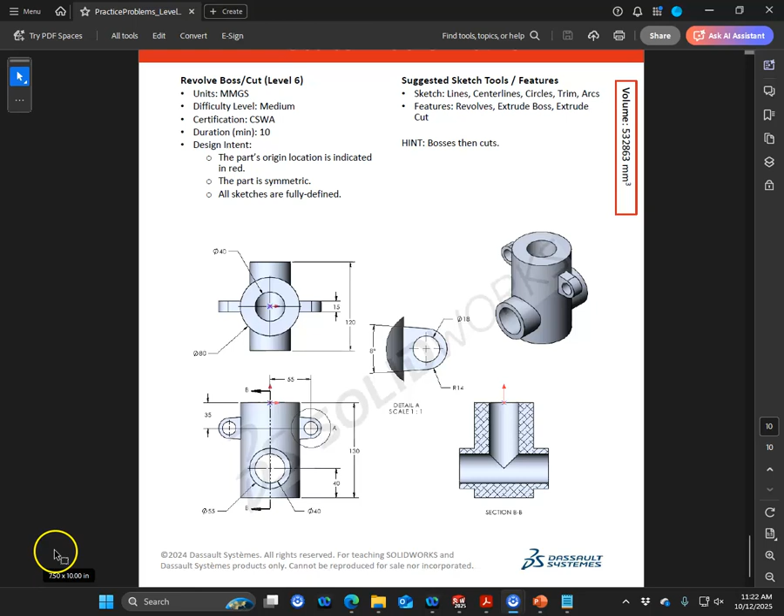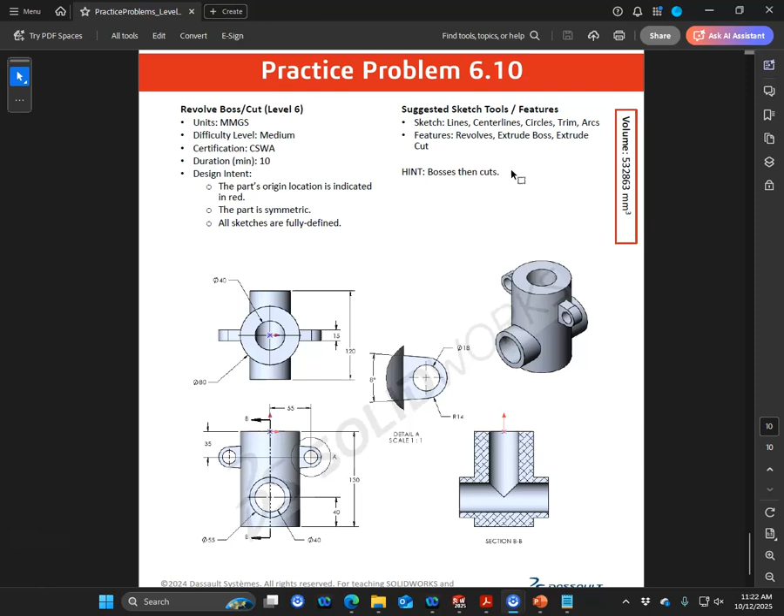All right, problem 6.10. We're still in millimeters. Part origin is located at the top, middle, center. Lines, center lines, circles, arcs, revolves, extrude boss, extrude cut, bosses, then cuts. So I'm not seeing where this really needs to have the revolves, but let's go ahead and do a couple of revolves. We can also revisit the offset plane to make this a revolve.

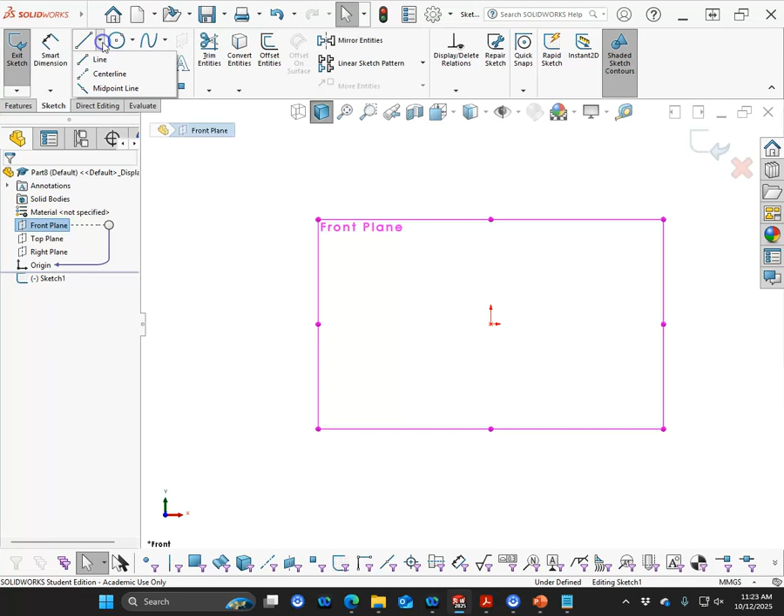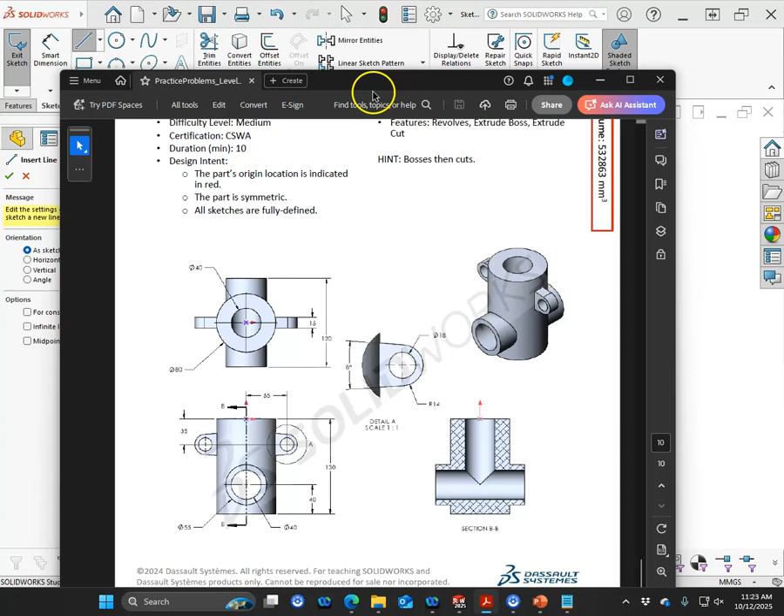So we'll go part millimeter, front plane. Anytime going into the revolve, we're going to use symmetry. I'm going to consider doing the infinite length center line. I thought about maybe putting this kind of shape, but when we go this way, it's going to close that off. We're better off leaving them as solids in this case. So we can just go rectangle, and this is why it's a toss-up for the boss. We're drawing a circle and extruding it, or we're drawing the rectangle and revolving it.

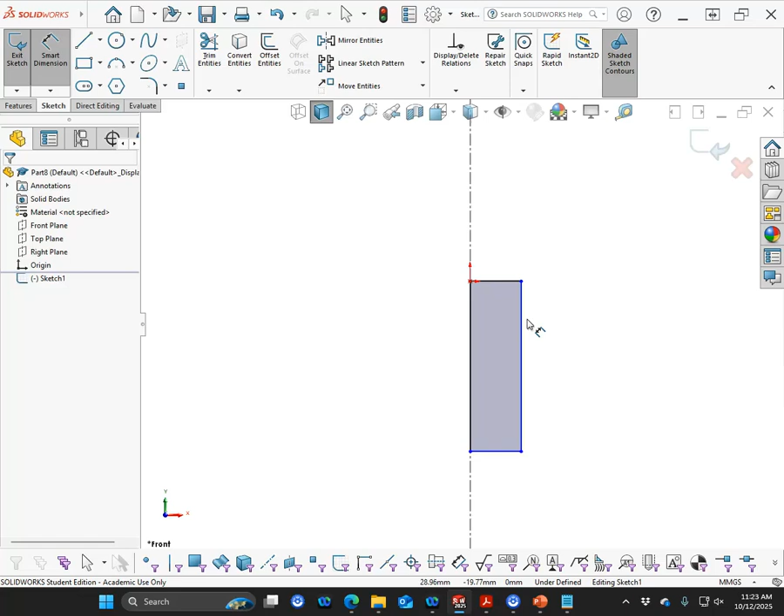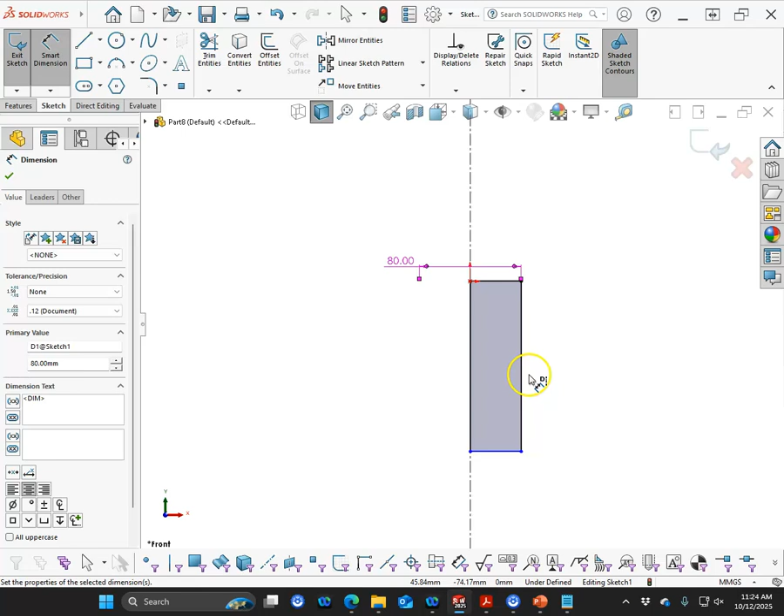So our diameter is, see if we can find a number here. 80. Oh, that is the top side. Okay, 80 with a 40 through. Okay, so 80 on the diameter and 130. I was trying to reverse those numbers. 130, and we just go ahead and we do the revolve base 360 degrees.

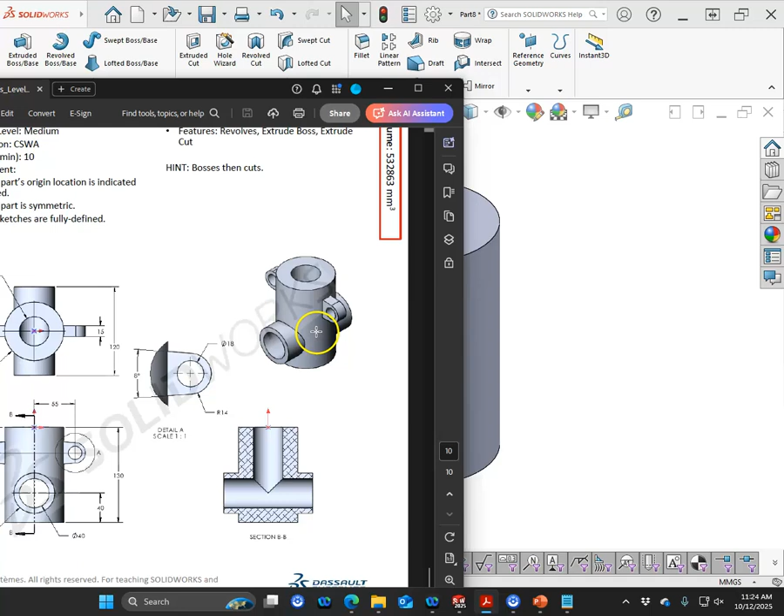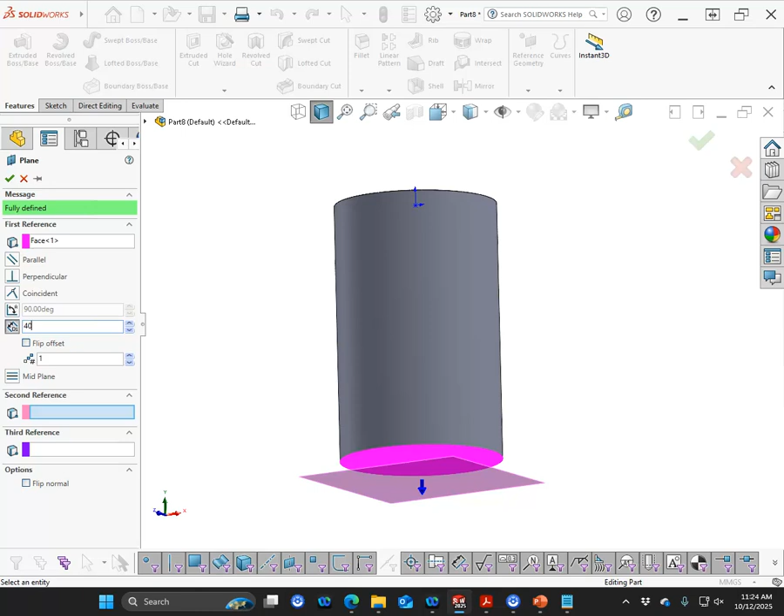All right, so if I just drew the intersecting as an extrude through, I wouldn't have to create a plane, but we want to just revisit planes wherever we can. So plane and its center. Let's see, we need to reverse the direction. So it'll be a flip offset of 40. And when I flip the offset, that should bring it up to there. And we should be able to go right into the sketch.

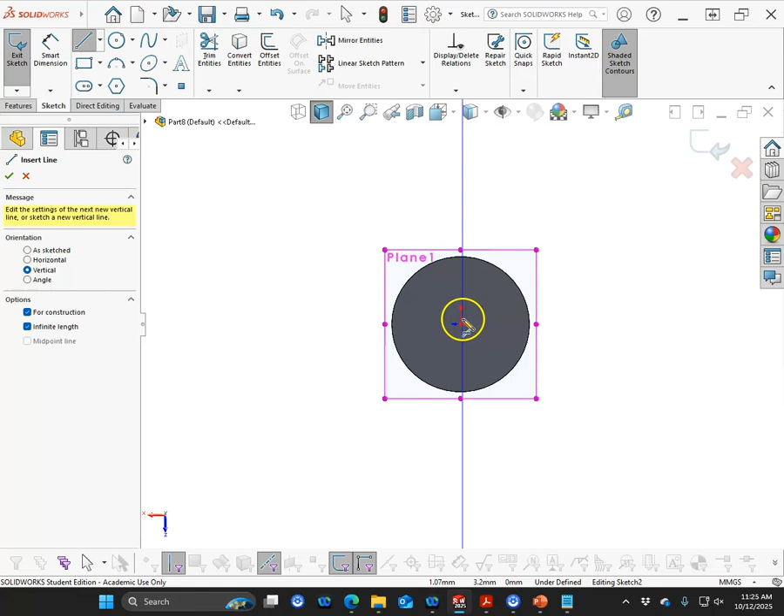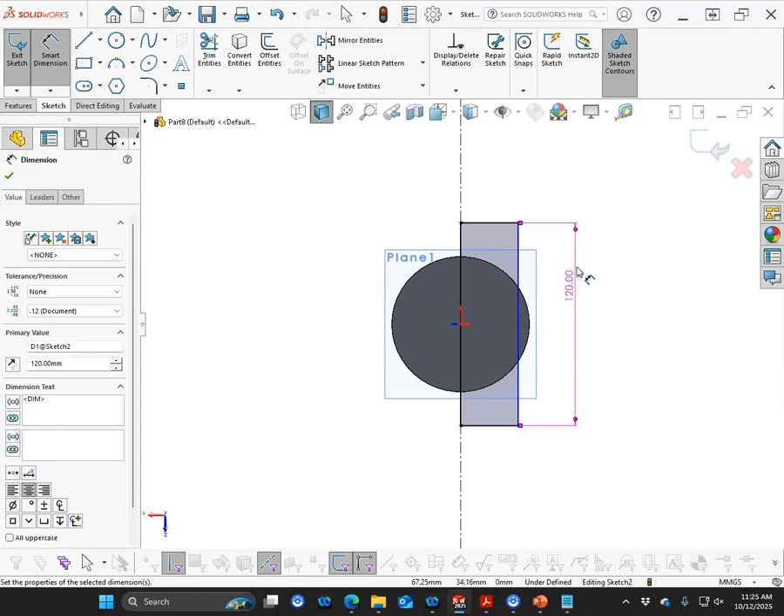Same process, center line. We're looking at the origin, making sure it's going to be vertical, infinite length. And then I can go back into select, except this one is going to go for a midpoint. So if I escape out of the rectangle, select the line, control select the origin, we can go right to midpoint, and its overall is 120 with a diameter of 55. Okay, so when this one does the revolve, we're going to be able to see that intersection. All right, we can hide the plane.

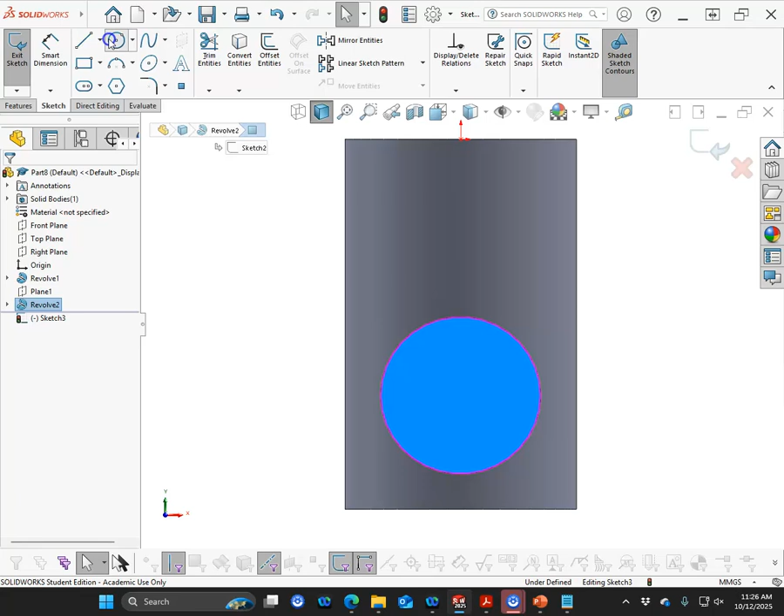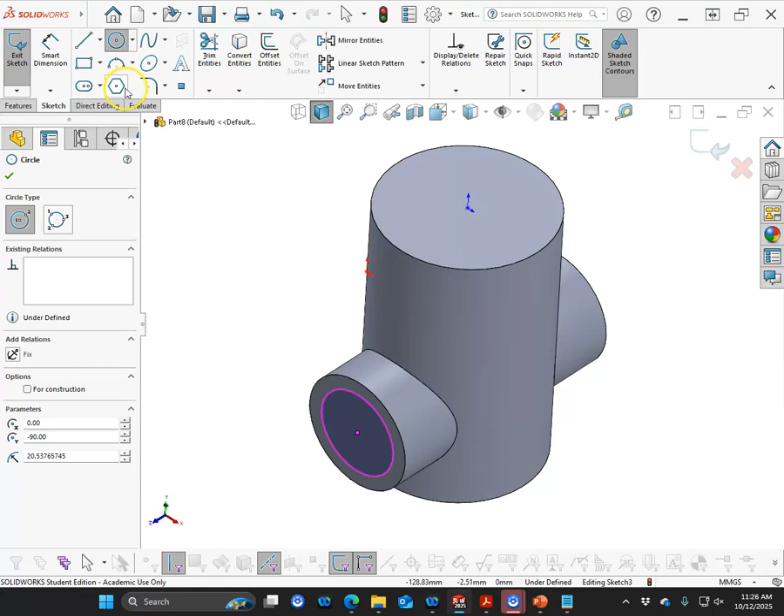Again, you could have opened up a sketch on the front plane, drawn the circle and extruded it mid-plane to 120, and you would have the same result. There's nothing that says otherwise, other than I wanted to create the plane. All right, so my through, I could have included that, except I don't think it would have removed the interior. Since it's a revolved boss, it would not have removed the material on the interior. It would have left that. So doing the extrude cut all the way through with a diameter of 40, features, extrude cut through all is fine. We go ahead and hit OK.

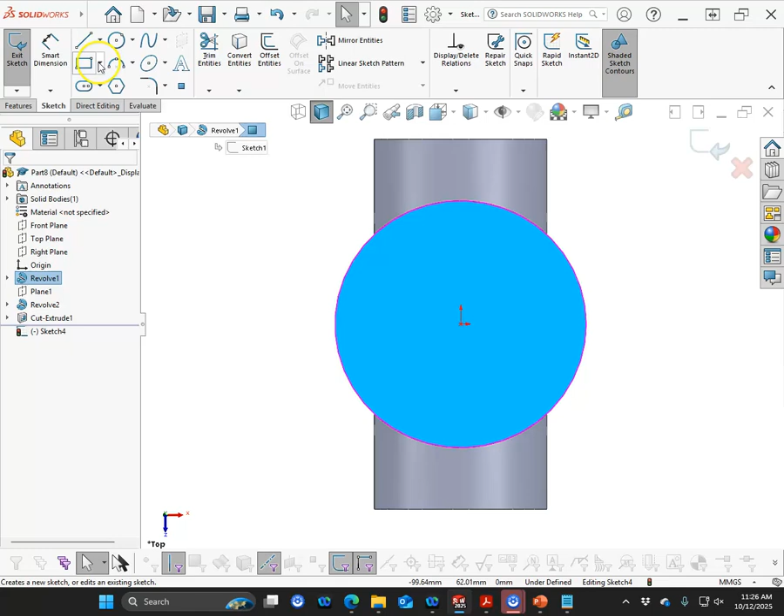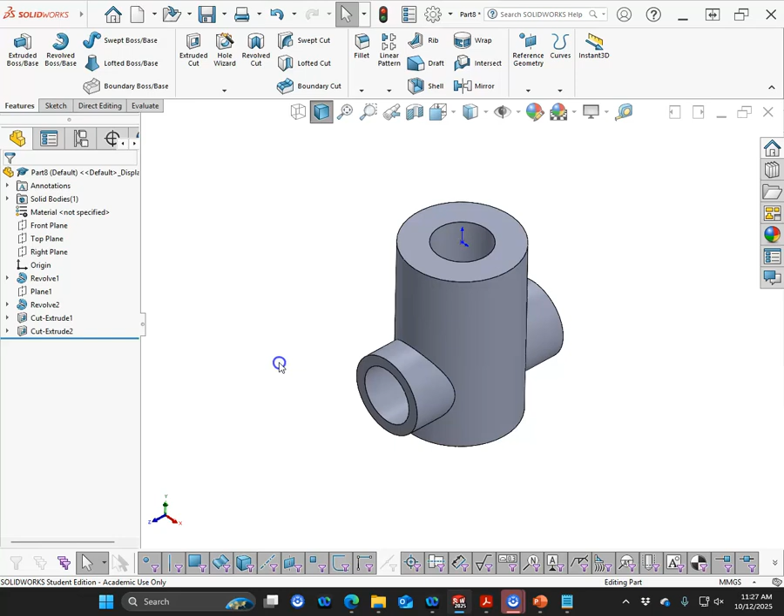All right, for the top then, we can open up the sketch, and that one has a diameter of 40, so they should line up pretty close. Into the smart dimension, 40, and then this one just becomes an extruded cut up to next, so it terminates at the intersecting hole. All right, on the front plane, let's get a sketch started, and these are on the mid plane for the ears. So really only need to draw one, but I need to draw it far enough inside because if I go right to the silhouette edge, it's not going to connect.

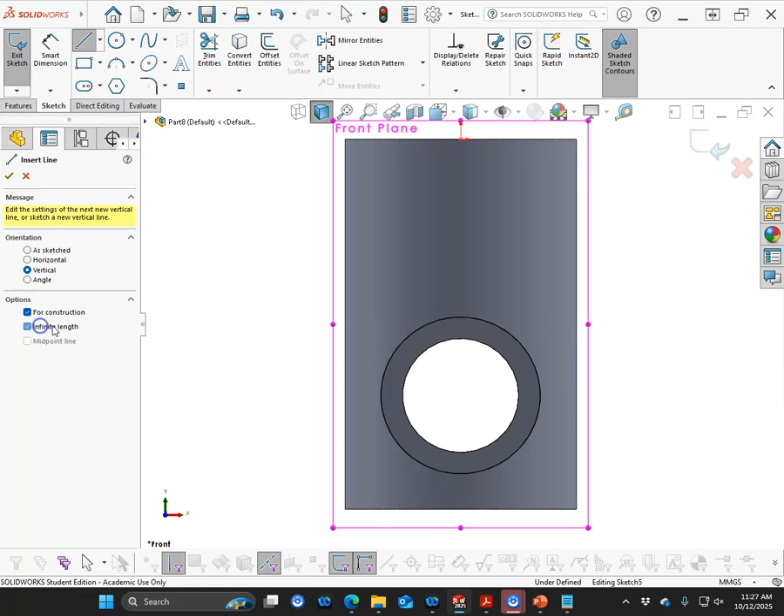So because I want to mirror these, let's add the vertical infinite length center line. And we'll go ahead and put the circle in because I think that one's actually going to give me a little more geometry. So the interior is a diameter of 18. So I'm looking for that smart dimension on the context menu, but this time I'm going to go to select and move that out just a little bit and probably down just a little bit.

All right, so the distance from the top is 35. And from the center line we created is, oh, they gave us the 55. All right, so we can stay with that, 55. And then let's go with our center point arc. And we'll keep moving reverse if I don't like it. I'll keep moving that geometry to get to a starting point, to get the desired result.

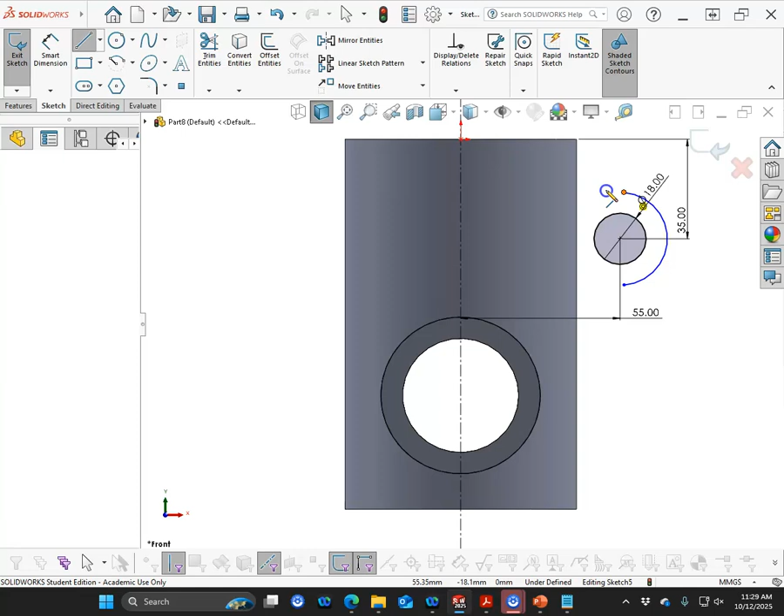So we do want to be inside of our geometry. I'm going to overrun the cylinder. Let's make sure we have some tangencies. No tangencies, so select, Control select, add the tangent, select, Control select, add the tangent. All right, so there isn't really anything adding symmetry. If I don't want to add a center line here, I'm just going to select the midpoint and Control select the center point of the circle and tell it that it's horizontal.

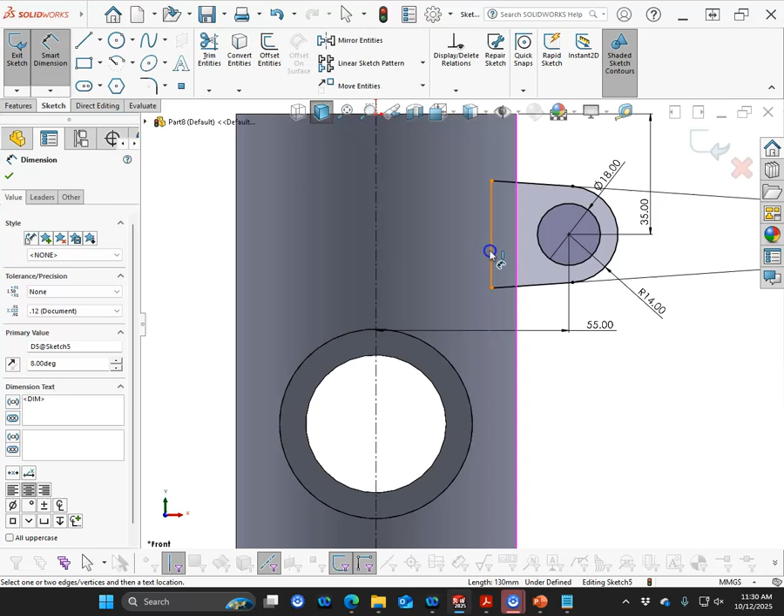All right, so the radius becomes 14, and since it's already an arc, we get the 14. And between the two lines, we get 8 degrees. Yeah, 8 degrees. Not much, but enough. And then we could either go from the silhouette edge to the line or from the center. Silhouette edge is going to allow me to overlap enough that it's going to intersect the cylinder. All right, so let's go ahead and mirror those entities.

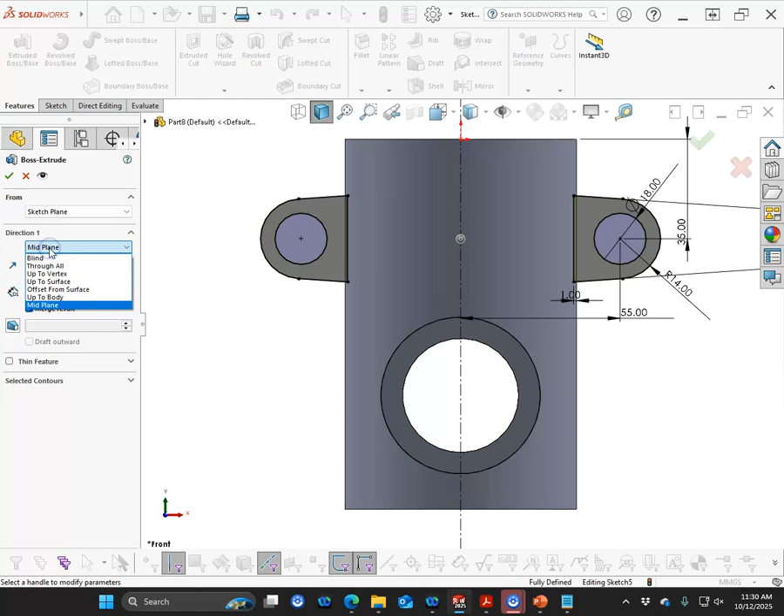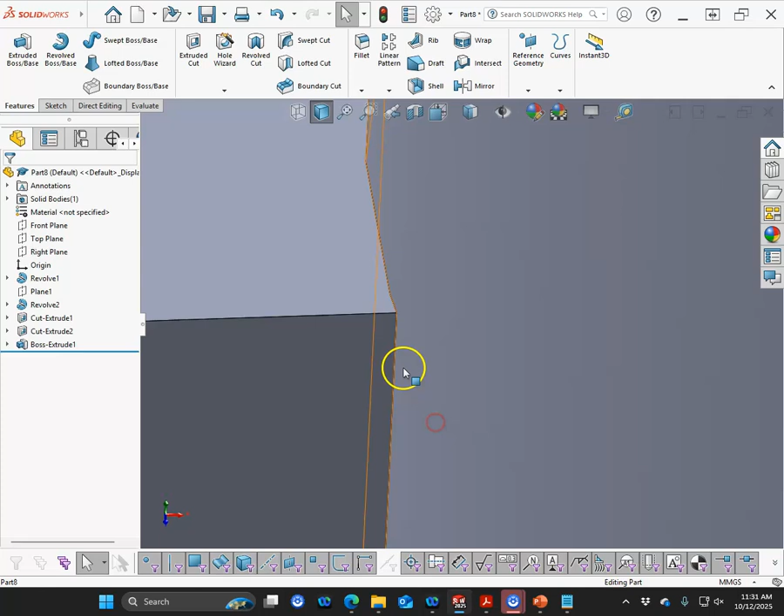Feature, extruded boss, and then its thickness is 15, and it's mid-plane because we did that last time. We go ahead and accept. So let's make sure that I went far enough in, seeing how the diameter of that was pretty tall. I don't see a little sliver there, but I can always make that a little bit deeper between the faces. But I think there's enough there. I'm not seeing anything that would indicate that it didn't fully penetrate into that cylinder.

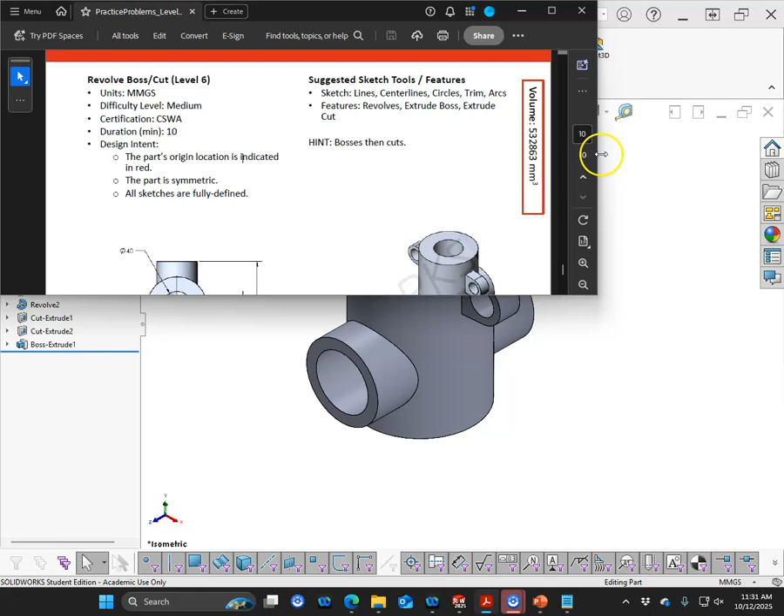All right, so we've got our geometry, and we are looking for something. Windows would stop doing that. 532,863. Let's go with the evaluate, and 532,863.6. So pretty darn close. Make sure that you save this P6-10.